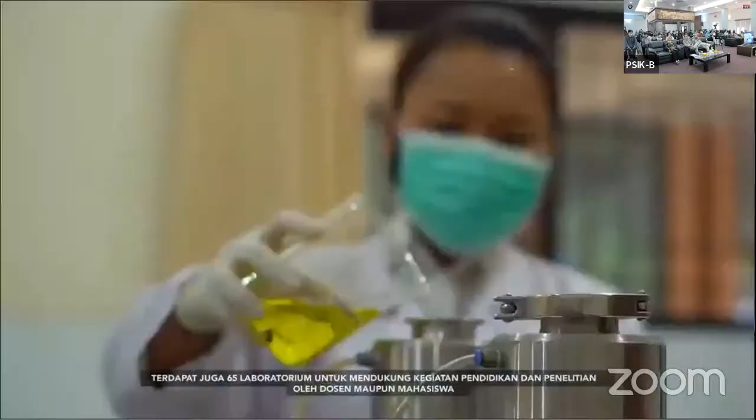There are also 65 laboratories to support educational and research activities by the lecturers and students. We are committed to continuing to improve the competence of lecturers and students, especially in facing the era of digitalization.

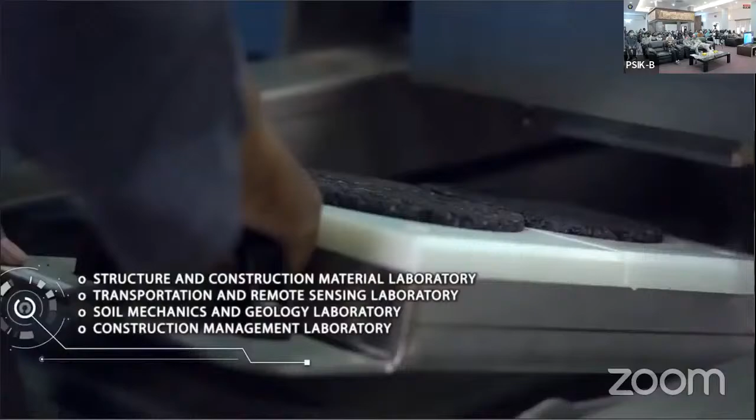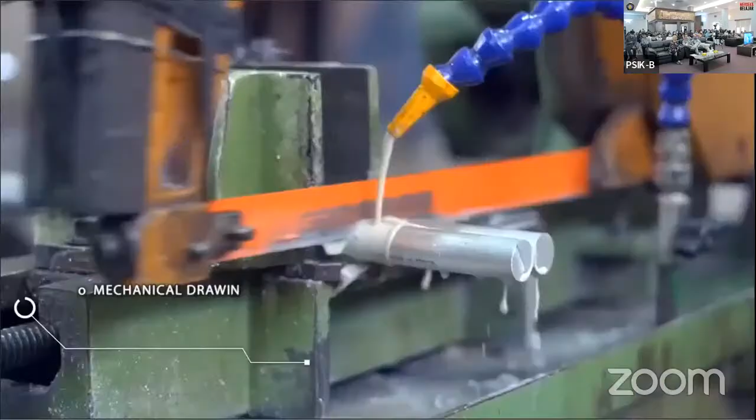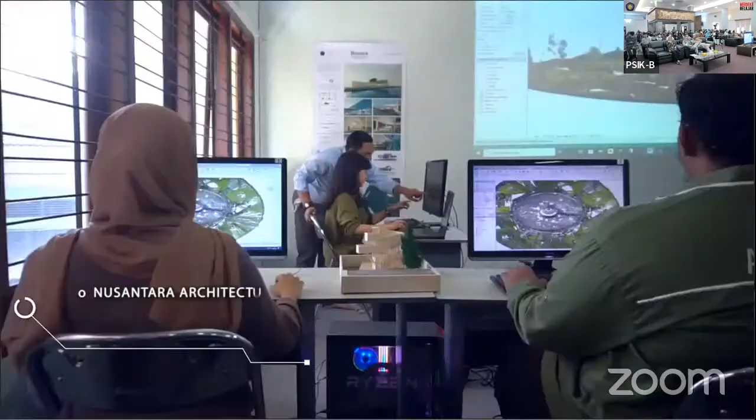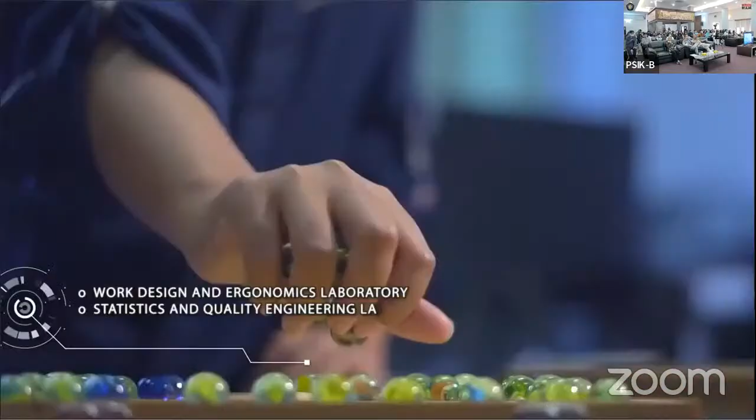The 9 departments under the Faculty of Engineering are: Civil Engineering Department, Mechanical Engineering Department, Water Resource Engineering Department, Electrical Engineering Department, Architecture Department, Urban and Regional Planning Department, Industrial Engineering Department, Chemical Engineering Department, and the Engineering Profession Program.

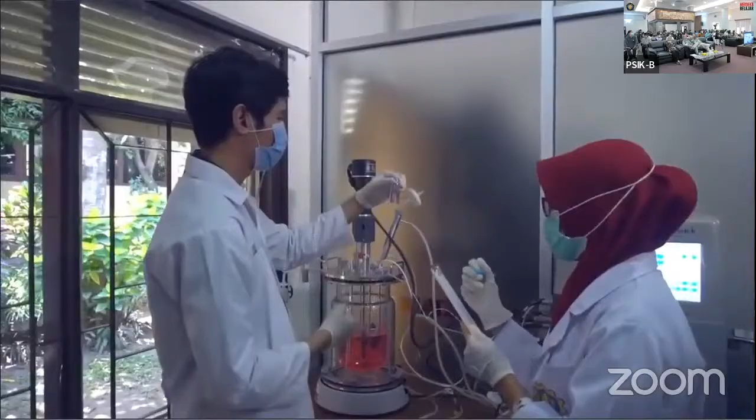The Faculty of Engineering provides facilities to support the academic atmosphere, including adequate classrooms, comfortable discussion rooms, libraries, worship places, canteens, sports centers, and student activity centers.

We believe that the Faculty of Engineering will further develop through collaboration with various stakeholders, through student exchange programs, double degrees, split programs, visiting professors, research collaborations, and international conference collaborations. Every year, lecturer achievements in the form of patents for research innovations are increasing. Students have also made proud achievements at the national and international levels.

With a spirit of innovation and collaboration, the Faculty of Engineering, Universitas Brawijaya, will work hard to present the best achievements for the sustainable development of the Republic of Indonesia.

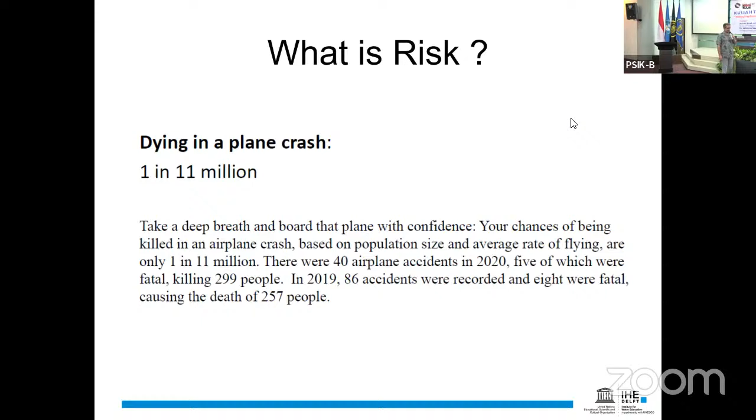However, if we really think statistically, the chance that each of us dies on our birthday is very high, because we have 365 days, and so the chance is 1 over 365. Okay, so we have 365 days, and therefore the chance is actually very high.

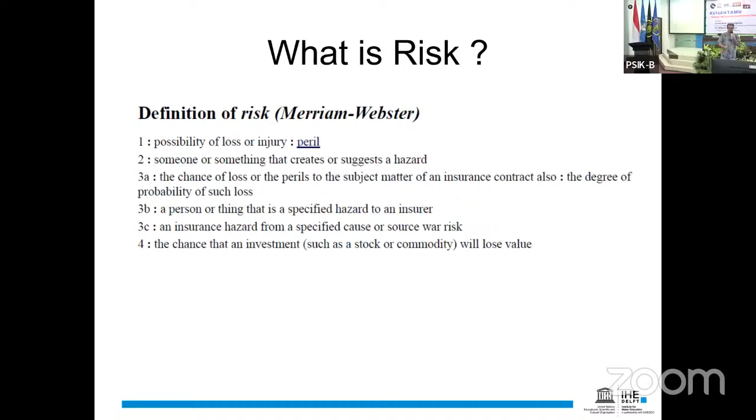Now, to get a more serious definition of risk, if we look at different definitions of risk in different dictionaries, for example this is a definition you can find in the Webster dictionary. I don't want to go into a lot of detail, but there are two important things we can see there.

So you can see that when we are talking about risk, we are talking about two main things: the probability of something happening to us, most probably something bad, as well as the consequence of that happening.

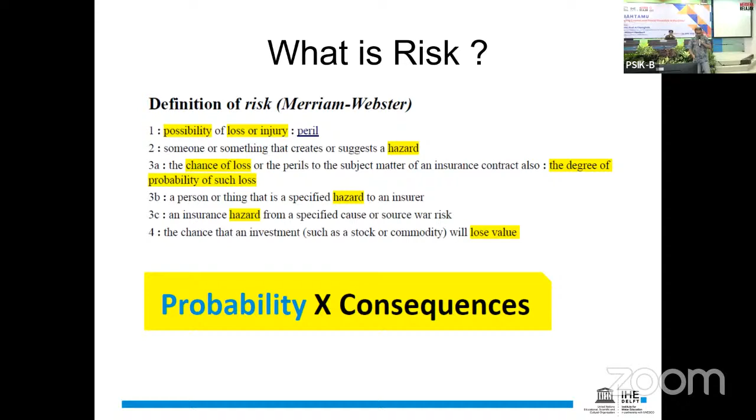For example, going back to the lady at the corner who was talking about the plane crash: although the probability of a plane crash is very low, because indeed we will lose our life, the consequence is very high. So the risk may be very high if we think about it that way. So this is about probability and consequences, and sometimes you accept the risk by reducing it to an acceptable level. For example, when you take your bike to come here, you accept risk.

But if you manage your risk and bring your probability of accident low, even if something happened to you, the consequence will not be so huge, so eventually you accept that risk. So this is all about probability of what happens to us and the consequences.

If we agree with this simple form of risk, then if we are planning for anything, for our future, for flood management, for taking a bus or a plane, or any planning, if we can determine what can happen, with what likelihood, with what probability, and what is the consequence of that event for us, for example a plane crash, a bike crash, or winning a lottery, that is also a sort of risk assessment. If we put the probability and the consequence together, then we can generate our so-called risk map.

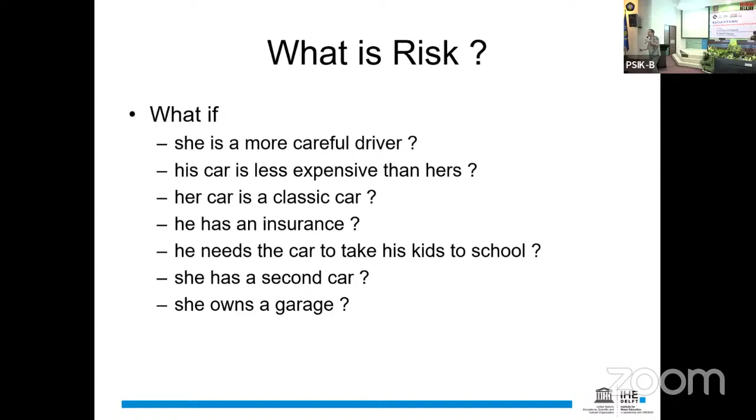We do the exact same thing also for flooding. But now, just to put some structure to it, in our terminology, or in the framework that I like to use - there are many different frameworks - I will divide the risk components into 3 components: hazard, exposure, and vulnerability. Hazard in this case is the accident.

In flood management, hazard is the flood - water comes in. Exposure is the asset, the valuable thing that we have which is in danger. In the car example it is the value of the car. If it is flood, it is the house, it is our house that may get flooded. It is our furniture that may be destroyed, our TVs or cars or whatever we have in the house which may be destroyed.

Then we have the third and maybe most interesting component of the risk, which we call vulnerability, and this is the degree that we can cope with the flood. For example, in the case of the car accident we discussed, if you have insurance, you reduce your risk, so you can cope better with the risk.

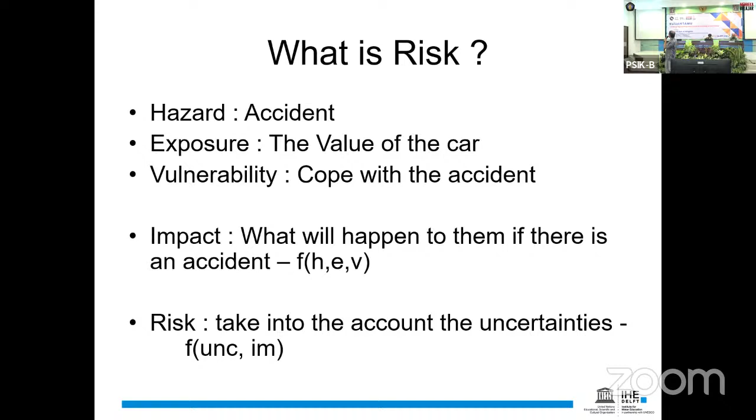So you reduce your exposure because your head is now not exposed directly to the ground or to the accident, but you have the safety there. So now, to reduce our risk, we can approach one or more of these components to reduce our risk. For example, if we are managing flood risk for ourselves, we can get our house insured. Or if the flood is always coming to our house, we can build it a bit higher, build 2 steps up, so that water cannot easily come to our house. But eventually, the risk is a combination of all these things with the probability of hazard.

And if we want to go back to the questions I asked about the car, and distribute it between different components, this is the distribution. The accident is the hazard, exposure is the car that they have, and vulnerability is how they can cope with the accident later.

So we talked about this, it's not important. Now, based on what I talked about, we want to put it in a more scientific, structural definition. When we are talking about general risk, for example for climate change or flooding, we talk about exposure and vulnerability. These are the definitions I took from the IPCC 2014 report. What is exposure? It is everything that is exposed to the hazard, like people, livelihood, species, ecosystem, environmental functioning, infrastructure, social or cultural assets. All of these are what can be harmed by a flood. What is vulnerability? It's how we can cope with that, how sensitive we are, how susceptible we are to the flood.

For example, when we're talking about flood risk, richer neighborhoods are less risky because they have more means to cope with the flood even if they are flooded, compared to poor neighborhoods. It depends on wealth, it depends on social status. For example, in some cultures, especially South Asian or Southeast Asian cultures, there's a sense of community to help each other in difficult times. So when the flood comes, a neighborhood can come together and try to solve it. This reduces the risk compared to living in a very individualist country where you are on your own. So culture also changes the vulnerability and eventually changes the risk.

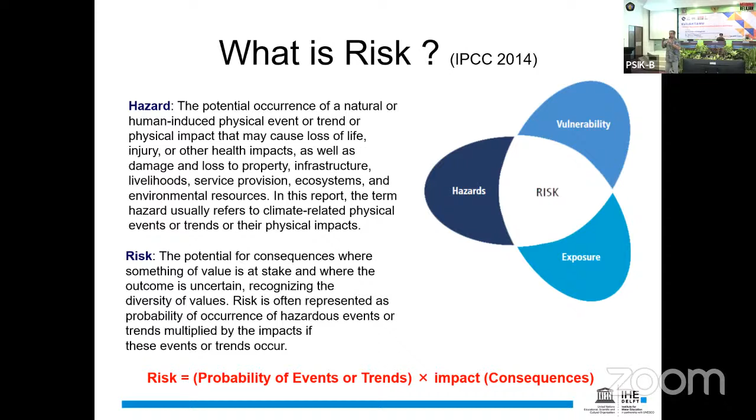Hazard is clear, it's the potential of a bad thing happening, an impact happening to us, and risk is putting it all together again: probability of event or trends multiplied by the impact or consequences.

Now, why do we need to do risk assessment? The main reason we have to do risk assessment is to be able to find where we have risk and try to do something there, try to reduce the risk there. But why can't we just go and make the risk everywhere zero? Why do you think we cannot go and make everything flood-free everywhere around the world, or in a city or a country, with zero risk to flood?

Would you do it if you could make the risk everywhere completely zero? Would you do it? Why not? You're shaking your head. Why not? You're not shaking your head? I haven't. No, okay.

You know, the main problem is that if you want to make everywhere risk-free, you need to have a lot of budget for that, a lot of money, that doesn't exist. So there is always a fight between resource management and risk management. We go to our mayor or governor and say, okay, we have a problem here. The first question they ask is, okay, how much? So we don't have that money. So there is always a negotiation between resource management and risk management. And then we need to go towards risk-informed decision-making, to do a risk assessment and decide which part is more important, which part is riskier, and then invest there to try to reduce risk and manage it together with our resources.

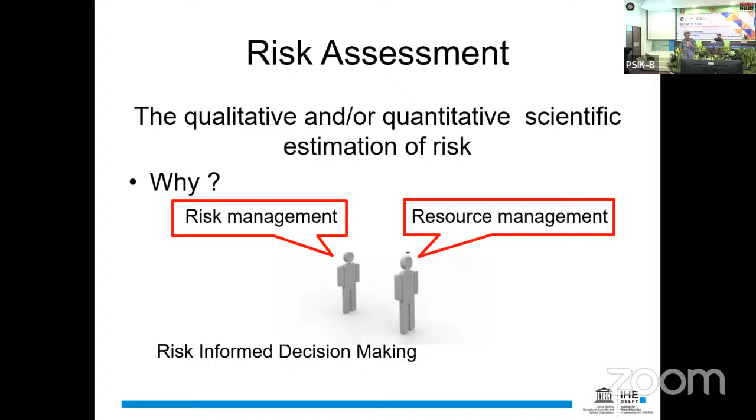Yep, so this is it. Now let's go to more of a flood. I was supposed to talk about flood, no? Not cars and bicycles. So imagine that you have a house beside the river and a flood is coming up.

One of the ways we do that is hazard is flooding. We look at the probability of the flood. We say, okay, it's 12% chance to have a flood. And then we say that if that flood comes, I will have 2 meters of water in my house.

If 2 meters of water comes to my house, I need to use 10% of the value of my house to repair it. So the hazard is flood, 2 meters of flood. The consequence in this case is 10,000 euro, and the probability is 12%. If we want to do it quickly in a traditional way, we multiply 12% by 10,000 euro, and we say your risk is about 1,200 euro.

That's a risk, but this is not the full thing, because we are looking at only one flood, 2 meter water, one probability, and we look only at the cost. So let's see if we can make it more complicated. Padoni laughs at me because I make life complicated step by step. Wait for it.

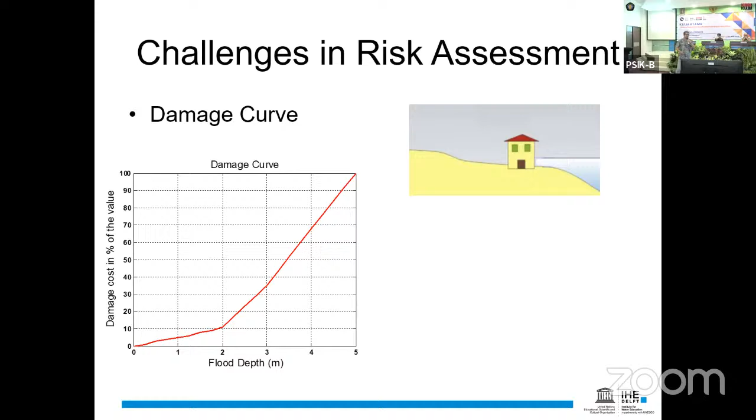Now by this, I can decide if I want to buy insurance or not, or maybe do something with my house to make it better. For example, if I put my expensive furniture on the first or second floor, I am better off because nothing will be lost on the ground floor if it gets flooded. So very simple things can change my risk, and this can help me decide what I want to do about it.

But this is not the complete picture of the risk. Why not? Just think about the secondary effects, the indirect effects. For example, to make life a bit more complicated, the fact of who will pay for repairing my house changes my risk. If there is no one to pay, no insurance, then I have higher risk.

If I have savings to do that, I have lower risk. So even two neighbors with the exact same house may have different risks, because one has savings and one doesn't, or one has insurance and one doesn't. How long does it take to repair? Can I repair it in 6 hours, or do I need to be out for a month or a year?

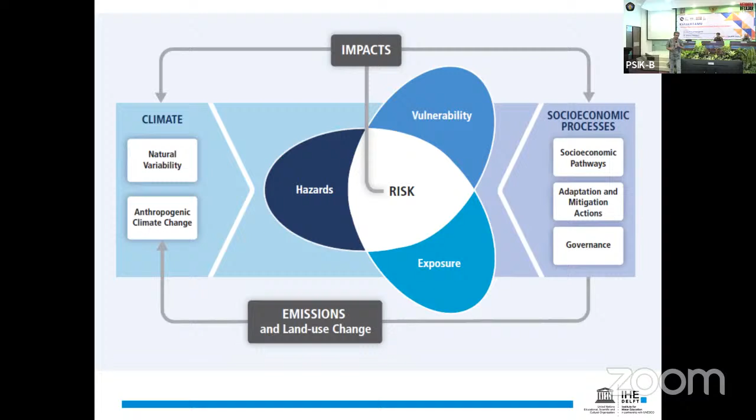So this will be the complete picture. We have vulnerability, hazard, exposure, so we have the risk, but climate is changing from one side and socio-economy changing from the other side. Climate is usually increasing our hazards, and economic growth may increase our exposure, or government may interfere to try to reduce our risk. This shows the full picture of risk assessment, for example in the flood risk assessment condition.

Now, just to finish this part of the course, I want to give you an example of a case in Indonesia where we did a flood risk management study. This is the city of Pekalongan in Central Java. Does anybody here come from there, from Central Java, from Pekalongan?

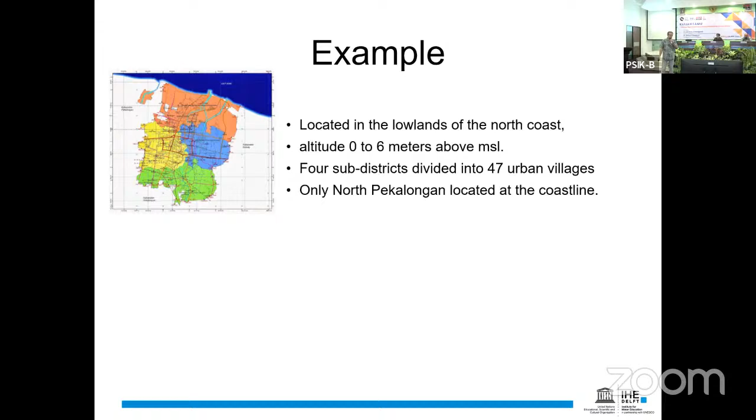I will show you. There's a city there, a very interesting city with some heritage. There are three rivers going through that city, and we also have the sea, of course, coming from the north.

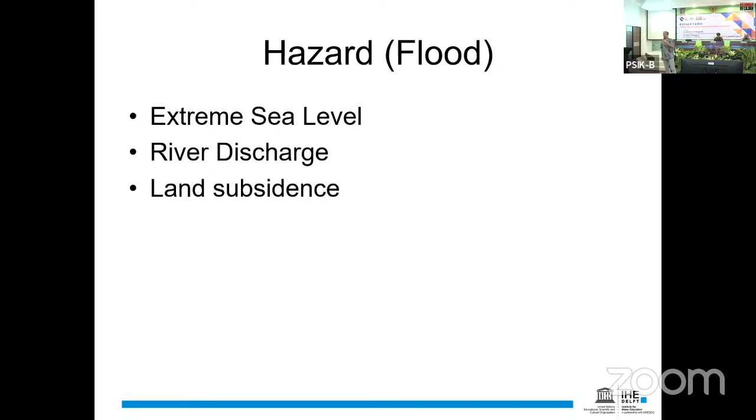Then we look at the flood hazard. The main reason of hazard there is extreme sea level, river discharge, and land subsidence. So land is going down, sea level is coming up, and rivers are coming.

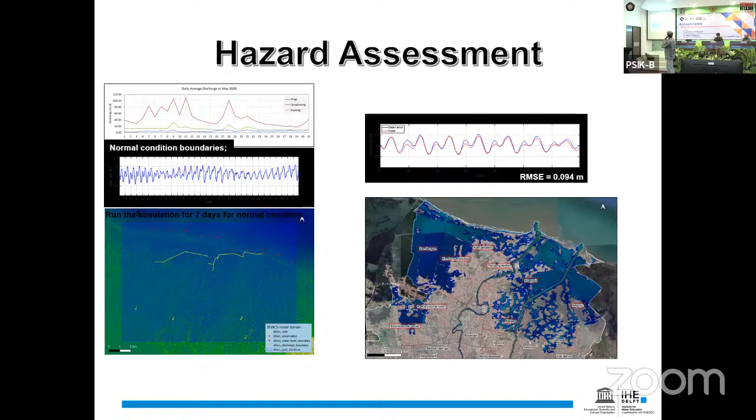So what we did, we tried to use the data that we have to make a flood map, so we can say that these places, based on one scenario, may get flooded. And if those got flooded, we looked at two scenarios in the future.

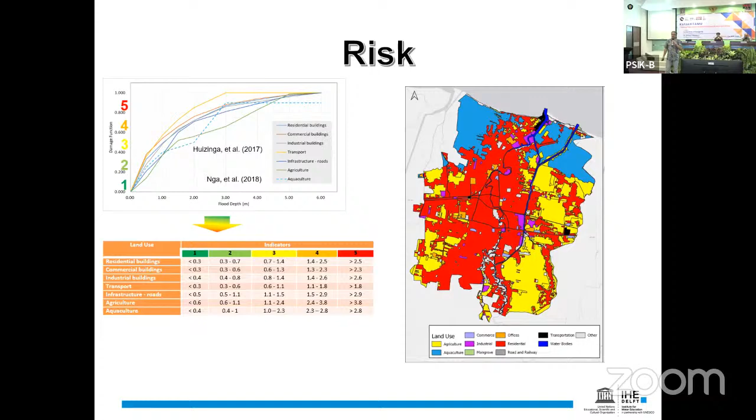Flood with extreme sea level and land subsidence. So we have extreme sea level in one scenario, and in another, land subsidence. Then we looked at the land use map of that city and decided how much water level each land use can accept, and developed a risk map like this.

Now you can see that in the present condition of land use and present flood, if we go to the future with that specific scenario, we will have huge risky areas, a lot of risky areas. A lot of places become red, because flood is increasing.

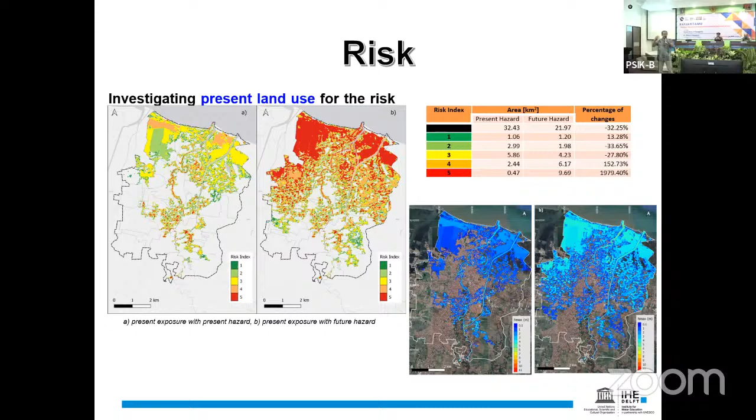But then we thought, okay, how can we reduce this risk? They came up with a plan for the future to implement a different land use in the city. And if we use that land use in our risk assessment, we saw that yes, indeed, if they make that land use in the future, the risk will be reduced.

So in this case, this specific risk reduction measure didn't do anything with flood. We didn't stop the flooding, we didn't reduce the hazard, but we reduced the consequences. So this is more or less the concept of risk and one example of how we do risk assessment. I think William will take it from here and show how we can do things inside the city to make it more resilient to flood risk.

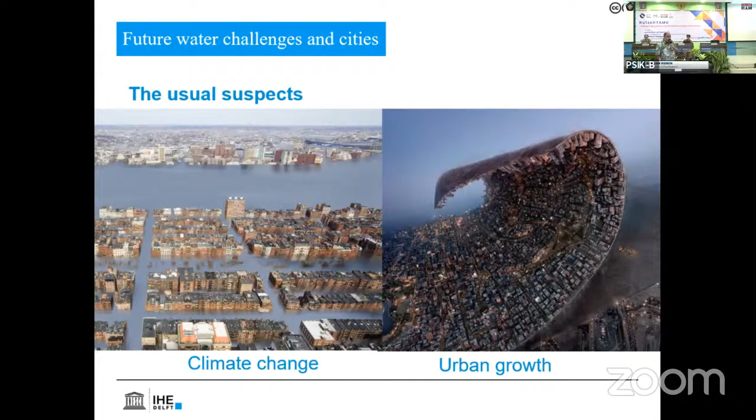Another risk driver is urban development. Ali gave you the risk components: hazard, exposure, vulnerability. Our cities are growing all the time in places where they shouldn't actually grow, in the floodplains, close to coastal areas where there's maybe a tsunami threat. We concentrate more and more people and assets in dangerous places, and that will definitely increase our risk in the future.

There are also other risks we engineers might be more aware of, and maybe planners not so much. Our infrastructure is getting older, starts failing, water pipes are breaking, our drainage channels are breaking or clogging up. A lot of our infrastructure needs maintenance, needs upgrading. In many European cities, the urban drainage system is extremely old, already more than 150 years old, at the turning point of breaking down, and needs large investments to be upgraded and to cope not only with future climate change, but also with the rainfall we have today.

So to summarize, cities have to cope with climate change, aging water infrastructure, rapidly changing urban areas, but also demands from you, the citizens. Slowly you want more urban green maybe, a more livable city, less traffic. So the way you look at your city, the things you accept from your cities are also changing. And we see an increasing impact of urban areas on our ecosystems.

If you're a water guy, from water resource management, we like to look at cities from that perspective. You can see a sort of evolution in cities. If we're on the most elementary level, and we only want to provide water supply access, we could say we live in a water supply city. This is the most rudimentary form.

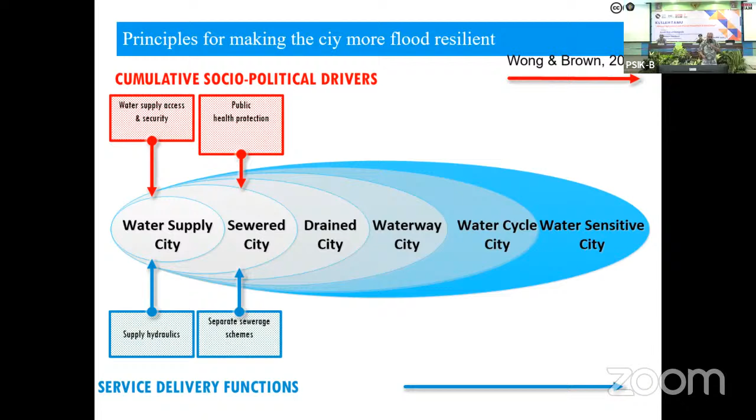After oxygen, water is the first thing we as humans need, right? Without it, we can't live. After providing water supply, the second necessity is public health protection, sewage. And we can move on, then we can start talking about flood protection. We move to the drained city. We want to require environmental pollution standards, etc.

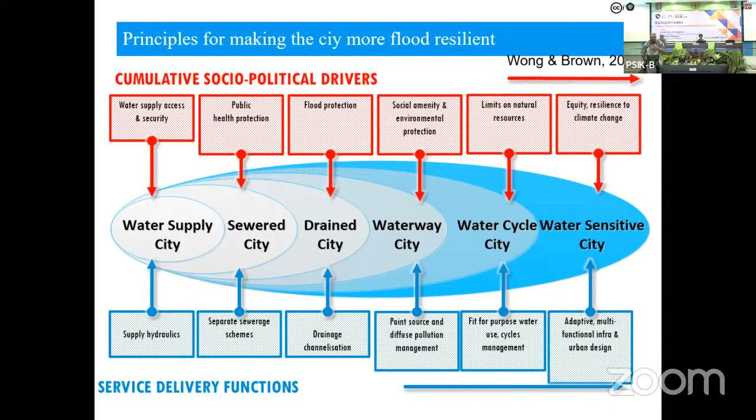We walk into the waterway city, the water cycle city, when we start to talk more about sustainability. And ultimately, you could say we want to move towards the water-sensitive city, maybe the last step in the evolution of cities towards a more sustainable, integrated water environment. Now, what is that? I'll tell you a little bit about that. If you're a water resource student, this should be bread and butter—you know this by heart.

Then we started to build our cities. So what did we do? We paved a lot of ground. So on the one hand, we have the same amount of precipitation, but because that water can't infiltrate anymore, we have large volumes of urban runoff. We don't have a lot of trees anymore, so that water cannot evapotranspirate, which is why the volume of runoff is increasing.

Also, because we live there, we have huge volumes of wastewater, and we have to import so-called virtual water and potable water. Virtual water is water that's embedded in products. So if you want to go there, you can talk about the water footprint—maybe you've heard about that. That's really the amount of water needed to produce particular products.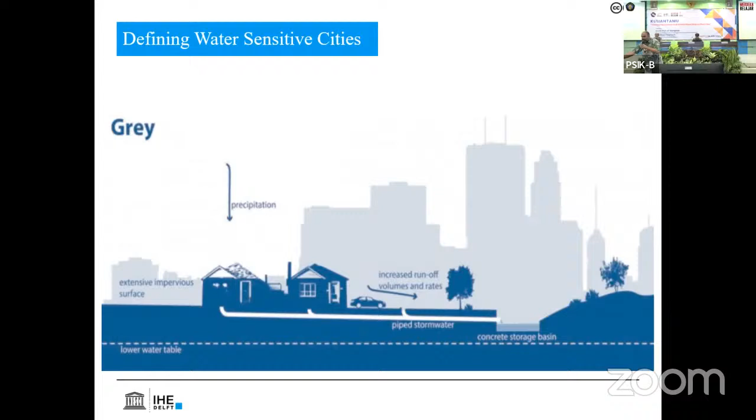So to compensate for that, we implemented a lot of so-called gray infrastructure, the typical engineer stuff - all the pipes in the ground to provide urban drainage, water supply, etc. And you see there often the difference between architects, planners maybe, and the engineers. Architects and planners, they care about what's above the ground, and all that other stuff the engineers have to solve. You guys do your thing underground, right, and solve our water problems.

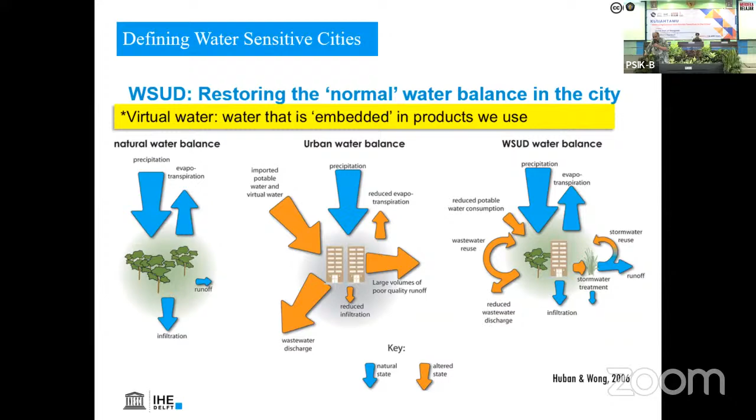Now, when we talk about a water-sensitive city, we want to integrate the two much more. So instead of just accepting the amount of runoff that we have, that is polluted maybe, and we get rid of it, we start to reuse some of our stormwater. We try to increase the amount of urban green that we have, so we have more evapotranspiration, and we treat some of our stormwater and increase the amount of infiltration. So what we do is we try to close that water cycle a little bit in our urban areas and bring some of that natural water cycle back to our cities. So you see that nicely over here, or what we try to do.

So what we typically did was - and this is for instance from my country, I'm from the Netherlands - when we look at the environmental degradation that our cities produced in the 1800s, just before the big industrial revolution took place, we were doing pretty fine. But then we started to build a lot, have a lot of heavy industry in the cities, and we really started to go above, let's say, a safe limit to the environment, and now we have to repair a lot of our mistakes that we made in the past.

And you see that very literally if you go here to Seoul, capital of Korea, South Korea. And you see what happened there. In the past, they had an urban river. That river was used mostly as a drainage canal, and as so often in the industrial age, that became very dirty. People dumped a lot of wastewater in there, solid waste, and they just covered it - made it one big culvert. And then car ownership was on the rise in the 1960s, so they thought, okay, we can cover it with a big highway, we hide the rivers, and we have good road access in our city.

And then some engineers said, hey, that was not a good idea. We're going to bring this back. We're going to do river restoration. We're going to really, literally, overcome the mistakes from the past. So actually, the company that built the highway - the CEO of this company - he became the mayor of Seoul, and he uncovered that road again. And that's the Cheonggyecheon River.

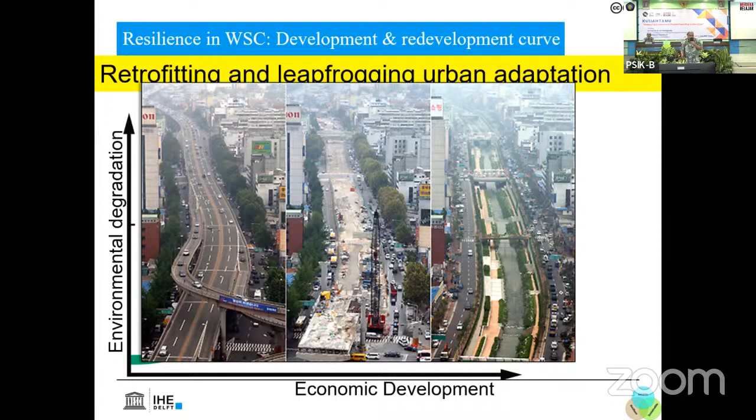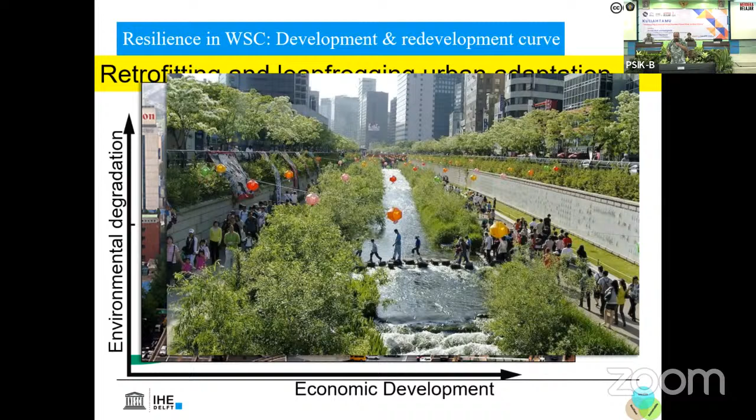And you see, for instance, how that looks now. Maybe you've seen images of this in Seoul. So there's a big river restoration project. The highway is taken away. They invested in more public transport. And this is now really an area that adds to the culture of Seoul, but very much also to the climate, providing a wind corridor, so there's a better urban climate in the city. And this is now one of the best spots in Seoul, and really celebrated all over the world as a great example of green urban regeneration.

Okay, so that's an example of a water-sensitive city project where we integrate urban blue and green above ground and really create an interaction between, on the one hand, sustainable urban development, and the urban water cycle, and the urban design and build form. So it's an integration between what you water resource people do, your engineers do, and you planners do together - not anymore as separate sectors.

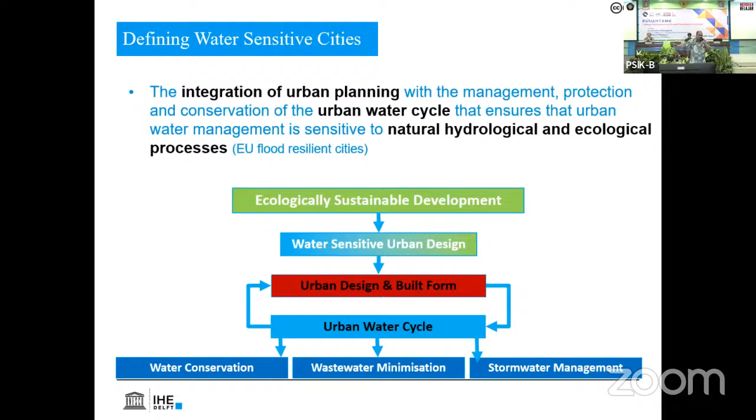So this approach you see now all over the world a bit. For instance, you might have heard about the Chinese Sponge City program. The Chinese are laying out a massive program to treat cities literally like a sponge - really to do more with their stormwater, reuse it, infiltrate it, and not anymore just drain it out in dirty old drainage channels.

In other countries in the world, they call it differently. So the water-sensitive cities is typically an Australian term, initially driven very much by drought management, because Australia, in the past, always had big drought problems - now you see also flood problems appearing. China has Sponge Cities, LID (low impact development) in the US, blue green infrastructure in Europe, sustainable urban drainage in the UK, etc. It's basically all the same - a little bit different approach, but it's a different name for the same concept.

An example of that you see in the city of Copenhagen. This is a huge flood in 2011 that they had. They called it a cloudburst event - they had 150 millimeters in 2 hours, and for Copenhagen, that's a huge amount of rain. So that's a 2,000 year event - talking about likelihoods and probabilities, that's a 2,000 year event that happened.

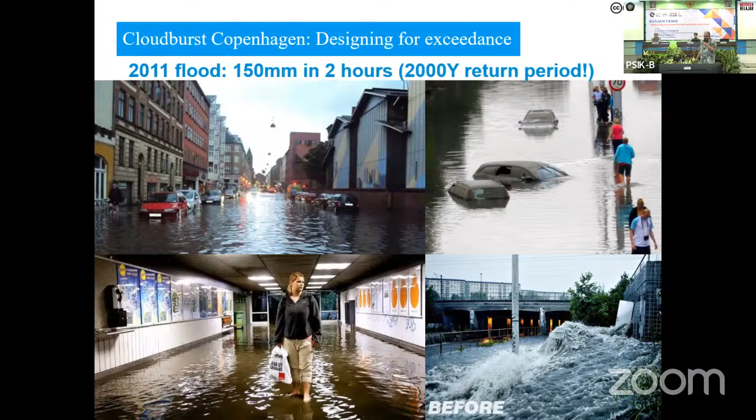As a response, they started to develop water-sensitive city projects that on the one hand improve the climate resilience, the resistance that a city has to climate impacts, but on the other hand also increase the livability and urban quality of the city. So they are now working on more than 300 different projects over the coming 20 years.

Let's not go too much into detail, but here you see the threats they are facing, and they really are facing a shift. On the left you see a 100-year pluvial flood, rainfall flooding, in 2010, but they also have to deal more and more with coastal flooding. This is a 20-year coastal flood event estimated for 100 years later, in 2110. So Copenhagen has to deal with multiple hazards.

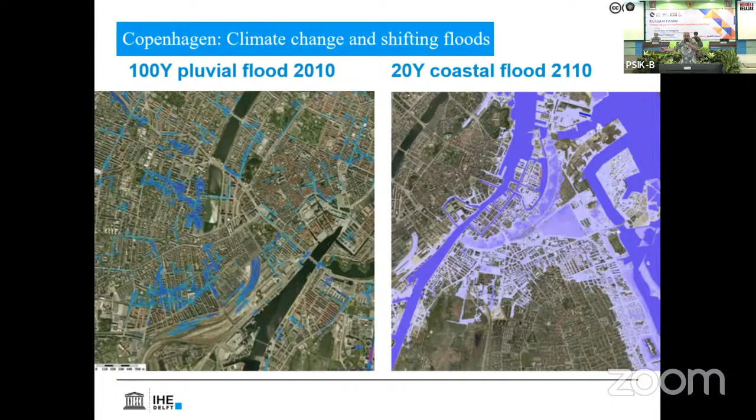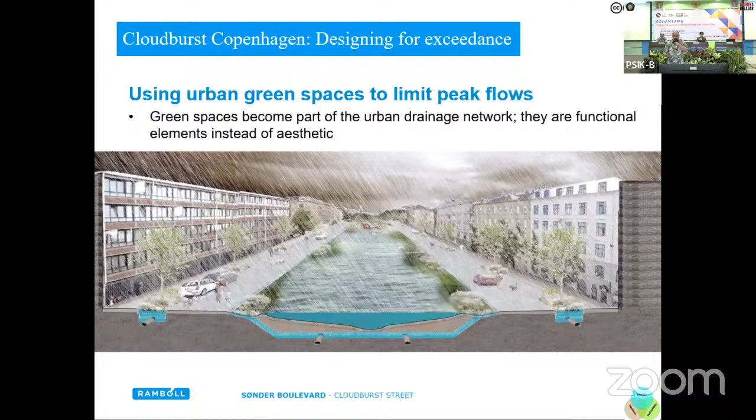Here it's raining, and here you see how that area functions during a heavy rainfall event. The street starts to have a function as flood retention. It's not anymore just something for the engineers to fix underground, right? No, it's integrated into the urban plan and the urban design of the city.

Here's an urban street where, during normal events, they changed a 2-lane road into a 1-lane road with a bicycle path, and on the side you see those green spaces. There stormwater is captured, treated, drained out, and reused again in other places. This is how it looks during a normal dry day.

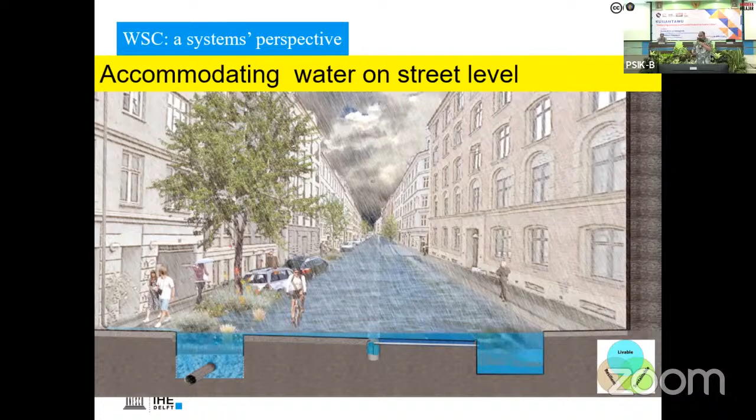But when it's raining hard and the street is flooded, you see the sidewalks are elevated on the side, so people can still walk there. But in the center, this area is really used as a flood conveyance channel and drained out. So this is a little bit how that works.

There's a lot of information about these kinds of things. If you Google bioswale on the internet, you see how these different layers are used to also clean stormwater. So you can really reuse it, for instance, for your garden, for other secondary water uses, maybe for your laundry machine, for your toilets, of course, etc.

Okay, that's all very nice quality, you saw a bit of flood. So let's structure this a little bit. Ali was talking a lot about risk, and if we talk about the hazards, he also introduced that we can think of four classes of events. You see that at the top.

You see everyday events, like today - nothing special, not especially bad weather, there's no rain. Typically, as an engineer, you don't design stuff for this. Then we have so-called design events. These are your standards. So maybe as an engineer you say, okay, I have a design standard of a rainfall event once every 5 years. So I have to create a drainage system that can capture all that water from a 5-year event, that statistically happens once every 5 years, and drain that out.

If the event is bigger, okay, we're going to have flood, but at least I reached my 5-year event. Then we have so-called exceedance events. That's above that event, rain that happens maybe every 10 years, or 15, or 100 years. So there's quite some flood, but it's not life-threatening.

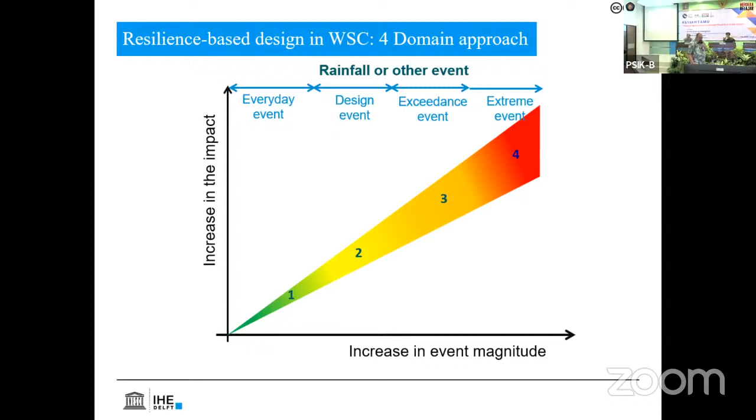Finally, we have our extreme events. Those freak events that once in a while happen. There's loads of rain, really 2 meters of floods. And the city we've been working on this past week experienced some of these events earlier. So you have these 4 classes of events. Now you could say that professionally we are dealing with those different classes.

I've never heard an architect who is thinking about design events. What is a design event, for instance? If you're an architect, there will be the fire escape. I have never seen an architect who put a lot of effort into designing a very beautiful fire escape, right? No, you are there to create urban quality, everyday quality for day-to-day events. You are there to create value in the city, livable cities.

As an engineer, you typically are also not designing a great fire escape, but you are the ones that make it. You have to make sure your buildings or other urban assets comply with the safety standards that are there. But you are not so much thinking of exceedance, what if they go beyond? Then we are talking about insurance, public works.

People have to clean up afterwards, right? And finally, if there are extreme events, that's something for the emergency service people, they have to handle that. Maybe the army even, who has to come into effect to help out, evacuate people, things like that.

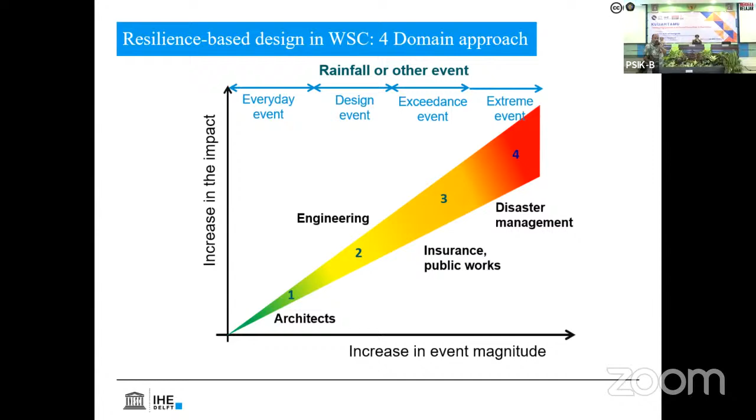So if we want to make our cities more climate resilient, we want to design in a way for as much as possible for all these 4 stages. Not only should architects think of day-to-day value creation, engineers not only think of design events, but collaborate. And also the emergency services and all those other stakeholders, professionals, could be integrated. I'll try to show you a few examples of this.

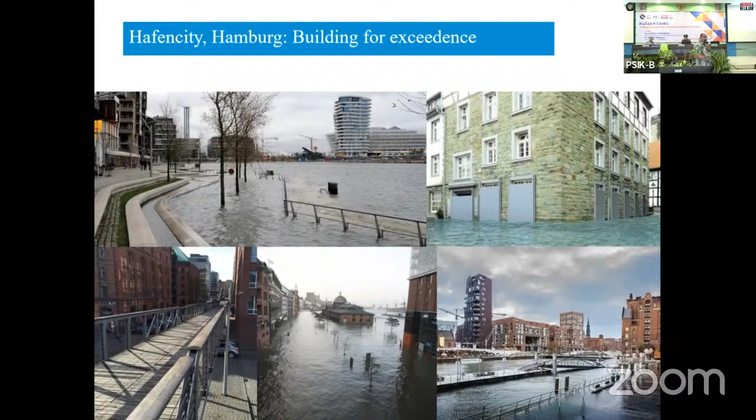Another example, and why they do this: this is in the city of Hamburg in Germany, where there's a whole neighborhood completely adapted to cope with floods. If they see the river levels going up, they know in advance, there's an early warning system. They have flood shutters that you see on the right side here, so all these houses can be closed. They have evacuation routes above ground, bridges. So they designed this whole area that looks great during normal events, but also still works during floods.

Because you water resource engineers who did urban drainage courses know it's not the volume of water that's the problem, it's the intensity of the peak, right? So if we have a very strong, short but intense rainfall event, our drainage channels cannot take it. But if it goes slowly, if we can delay that water flowing in, then there's not a problem. So that's what we actually do here.

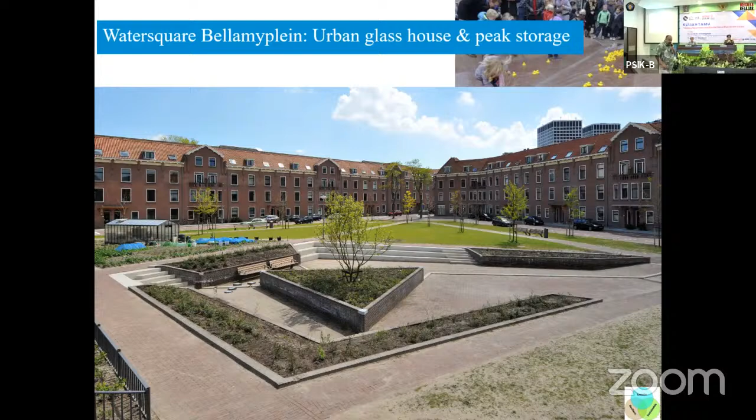So what brings people together in the world? Food. So they grow food together with the whole community of women over here, the children are there too. At the same time, they take ownership of the area, so they clean it and maintain it, so it works very well. It's a nice project, very simple. And when there's a lot of rain, it looks like this, with a little boy who put a lot of ducks in the water, apparently.

Bigger example. This is the project called the Big U for New York City. A while ago, Hurricane Sandy caused a lot of damage in Manhattan, but also in other areas in New York, Staten Island for instance. In a Rebuild by Design competition, they developed the Big U, led by a Danish design firm. They created a buffer around New York City to cope better with river floods.

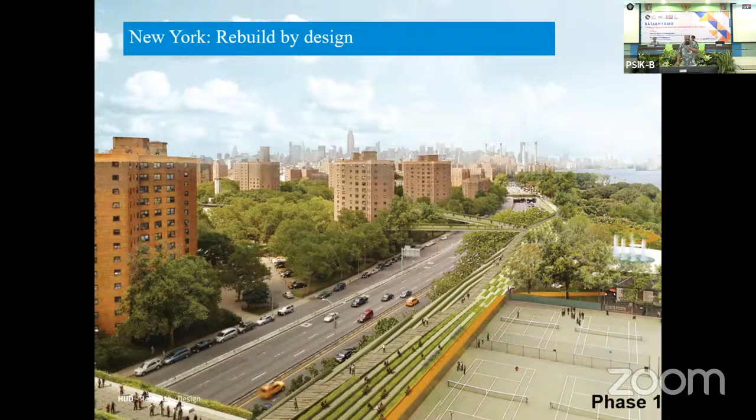This is a poorer area with these brownstone complexes, old social housing projects, and this was normally a highway, a bad area, disconnected from the water. What they did is first build a recreation park on the side, and now they are covering that whole highway to make it a dike that protects the area from future floods, but also combines it with a recreation area. So you have a multifunctional project, increasing the resiliency of the city but also increasing its livability. That's combining the two professions, the two values.

This also helps in the financing. The shops pay for the park. The national government, who is responsible for the dike, pays for that dike, and together they create a really nice public area that normally there would not be money for. So from a financial perspective it's interesting to combine things, because one function can pay for another where there would normally not be money.

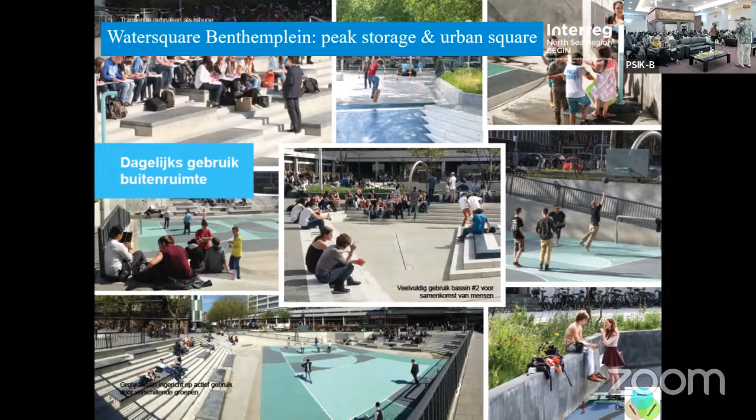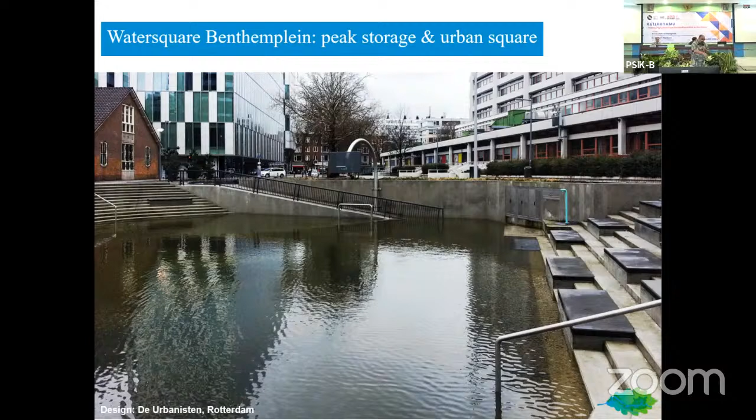More of these water squares. The water square concept in the city of Rotterdam is one they are employing everywhere. It's scalable, small-scale interventions that improve public space but also help make the city more flood resilient. The good thing is this is a gradual process, so you don't have to do it all at once. Whenever there's an opportunity for an area to be redeveloped, they start designing this, so slowly the risk level of the city goes down over time.

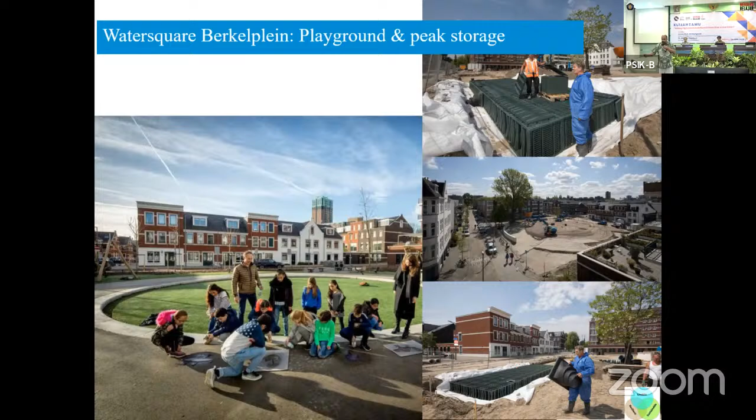Here's another one. On the top right you see these plastic crates in which water is stored underground, temporary storage facilities, and on top there will be a square for children to play and for the elderly to sit. A similar project is on an area that's normally never used, under a big highway flyover. Rotterdam is really searching for every spot available to store water and develop urban quality.

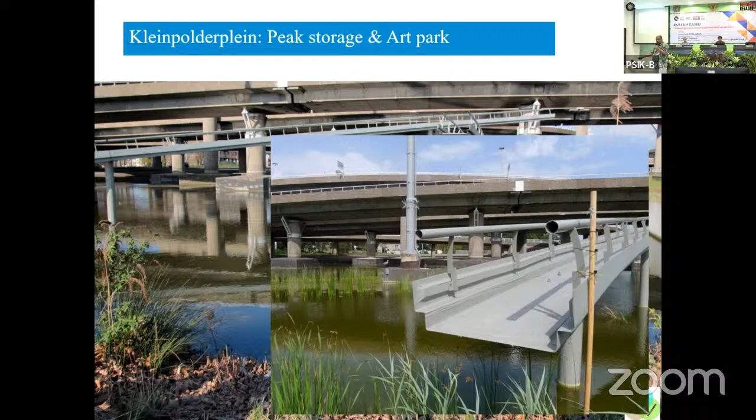Also here, a nature project where people now go to walk the dog for instance, but it's also used for flood retention.

We don't only do that in rich countries like the Netherlands, but we try to do it elsewhere too. Here I am in Bangladesh, in Dhaka, the capital, and here you see a so-called lift house, a house that can literally float when it gets flooded. It's built with a bottom made out of crates of PET bottles, plastic bottles that float in the water.

The bamboo structure sits on top. It's housing for the poor, so when there's a flood, that part will literally start floating. Here you see the construction of that.

Here you see similar things we are trying to do in a peri-urban area outside Dhaka, in a city called Sirajganj, where we make a so-called amphibious sanitation unit, with a floating construction and also a bio-infiltrated toilet where the water is cleaned.

We saw some interesting cultural issues here. I didn't design this, it was done together with another office. Culturally, this toilet didn't really work out. This is where design and engineering don't always align. From a water perspective, it works perfectly - the water is cleaned, the structure floats very well, so when there's a flood, no problem. But the toilet is extremely exposed, so nobody wants to go there, because you have the feeling the whole world is watching you. That was really a design problem - they didn't think it through very well.

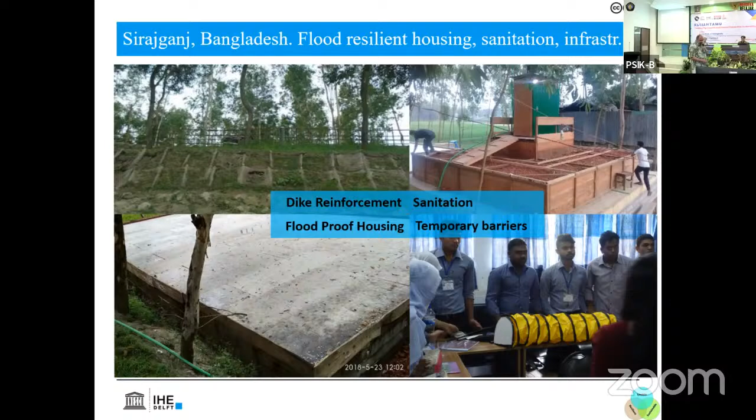Anyway, here you see us making floating floors. We retrofitted one of the very cheap housing units for the urban poor, where they normally have a floor on clay, and we made a new floor with PET bottles and wood on top, which can also float up inside the house during a flood. You see us collecting PET bottles here, and here's the construction of that floor in the actual house, and it can move up and remain stable.

That's quite a nice project, I'm very proud of this one. We had a lot of publicity, so that works when you do this stuff - there's huge attention at the moment for this. So don't think it only costs money. Everybody's looking for flood resilient solutions in cities, and if you can combine that with poverty reduction as well...

I'm still waiting for Bill and Melinda Gates to call me to sponsor a big project. But yeah, they're divorced now, so that's maybe a problem.

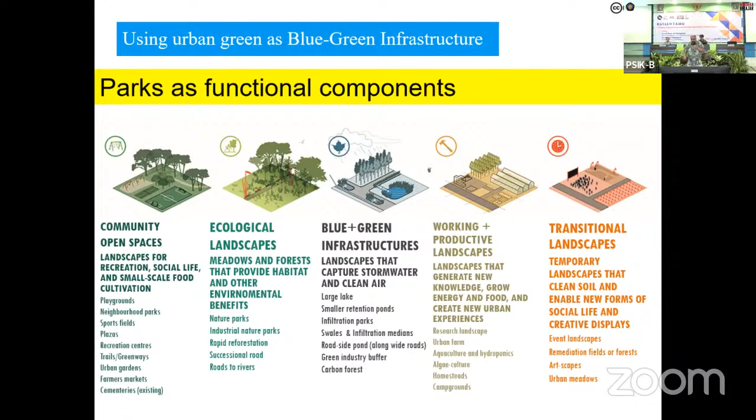I'm almost at the end, no worries. We try to do that with buildings, but also with parks, etc. So here you see that we no longer think of urban green spaces only as aesthetic things that make the city more beautiful, but as functional elements where we can add climate functions, and other functions, to the city. That can include community open spaces, ecological landscapes, blue and green infrastructure, working and productive landscapes, urban agriculture, and transitional landscapes, which can turn into big projects.

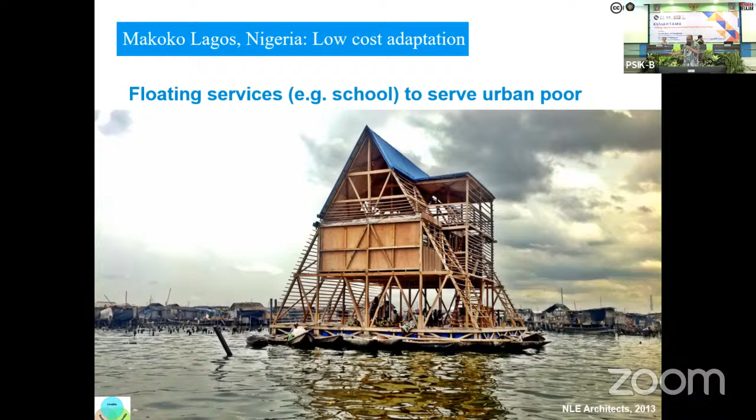And here we are in a project that is more flood resilient - this is a floating school in Makoko, in Lagos, Nigeria, one of the most challenging cities in the world, with a lot of informal settlements and literally no space left to build. So you can only resolve to floating structures that have the good quality of not flooding, because they literally move with the flow. You see that here in that largely amphibious, even floating, community.

In a place where there's a lot of people, there's nothing. So, again, an example of how urban planners and engineers should really work better together to create safer cities, but also cities that create more value for its people.

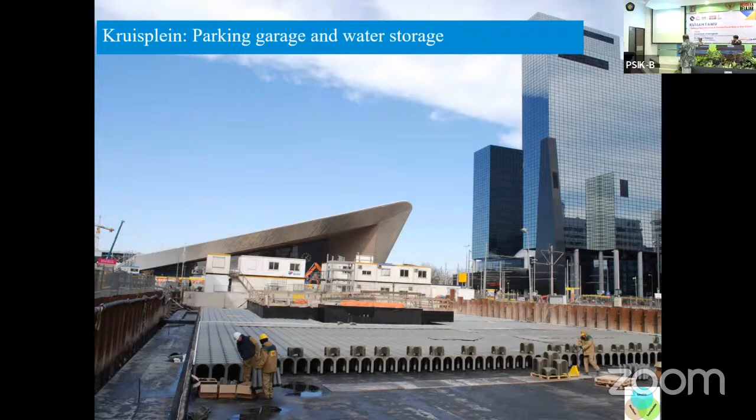Well, bioswales, I already covered that a little bit. Green roofs, here we try to mainstream this. The central station of Rotterdam, the train station, in front of it is a huge parking garage with 8 floors under the ground. Normally the people who designed those parking garages would just finish it and build it. But now here also the water people started to interfere and say, we also have a program, we need to solve a flood problem. So on the roof of the parking garage, they made another water storage with these plastic crates you see here. This provides temporal water storage that will be drained out later.

So again, a combination. And we have also our High Line, like every respectable city these days. There's an old train station that has been turned into blue-green infrastructure and is now used as a landscape park in the city of Rotterdam. That also has a function to provide less urban heat, because drought and urban heat is an increasing problem, also in my city in the Netherlands.

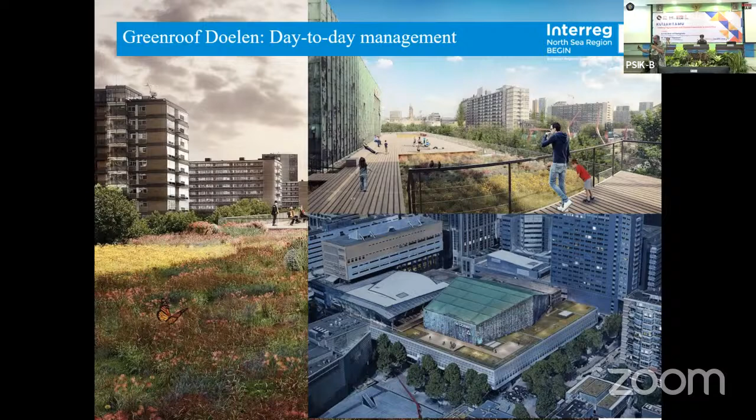Green roofs, we have a massive green roof program. Green roofs are nice, but they have limited functionality when it comes to flood reduction. That's often a bit overstated in the media. In the newspapers you'd say it's the next big thing after sliced bread, but that's really not the case. They can capture some stormwater, but if you have a peak rainfall event, they do not do that much. But for the urban climate, air quality, and recreation, they are great.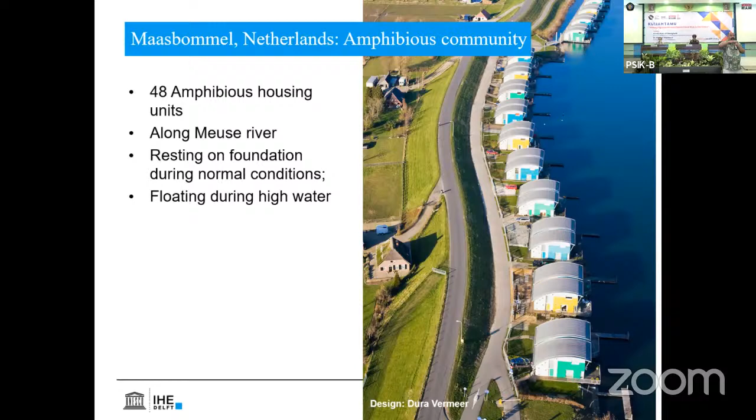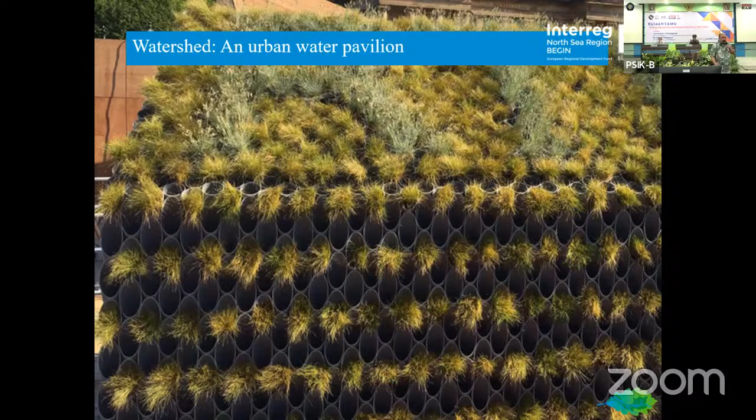And here you see a few projects just for fun, to make people more aware of the issue of climate change, of water. This is, for instance, a so-called watershed, a small pavilion made out of PVC pipes in which we put vegetation structures that will slowly drip through when it's raining. It's a great way to make citizens more aware of the issues of rainfall events and of climate in general. Here you see stormwater capturing, very small, simple projects.

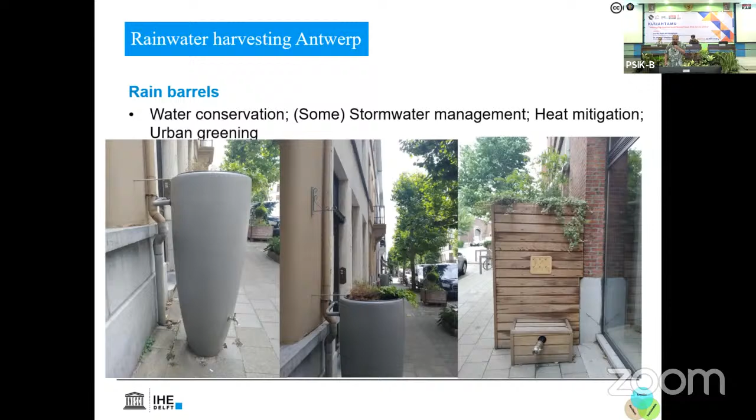Rainwater harvesting, again, water is captured so people can use it for irrigation. And if you do this at a massive scale, it starts to add up. If you have 5 houses where you do it, it means nothing, it's literally a drop in the ocean. But this is happening, this is in Antwerp.

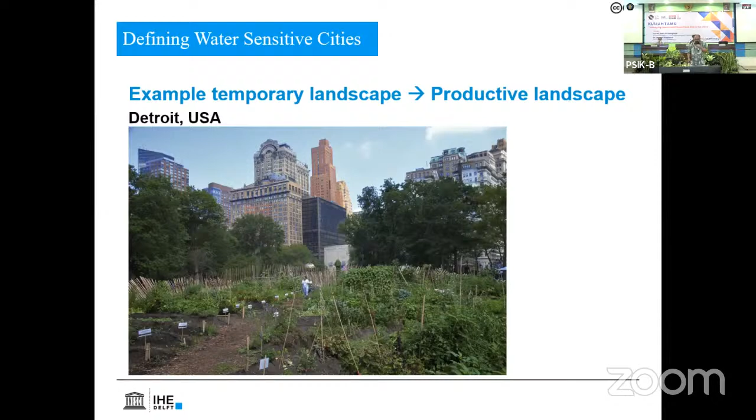Urban gardening and urban agriculture. This is in Detroit, a city that has been largely abandoned for a while because of the decline of the American car industry. So a lot of people moved away, and all of a sudden space was available, space was cheap. So you start to see an integration of urban green into the city, and ultimately this also has some climate function, although here it's not really designed and limited.

Okay, I'm closing. We developed a set of 10 commandments, if you will, for water-sensitive cities. If you want to be a water-sensitive city, we think you have to do this. So we often go to cities and say, can you score this? Can you test this? Can you do a self-assessment?

I don't know, we're in Malang here. We have the structures in place to involve citizens in the planning, design and implementation of blue-green infrastructure projects. Do you have that? If I'm a citizen, can I call and say I will be involved in the formulation of projects? Do you involve citizens, or is it difficult?

I don't know, okay, maybe I won't go through all these 10. But it is about citizen participation on the one hand, so how are you as communities able to be involved, but also to start projects by yourself if you want. I see some community-based projects also here, I heard about those. It's about design integration on the small scale, but also on the city-wide scale. So do you have a vision that involves climate change and climate adaptation, but also livability, ecology, and sustainability for 2050, for instance? It's about financing and evaluation. How do you finance this?

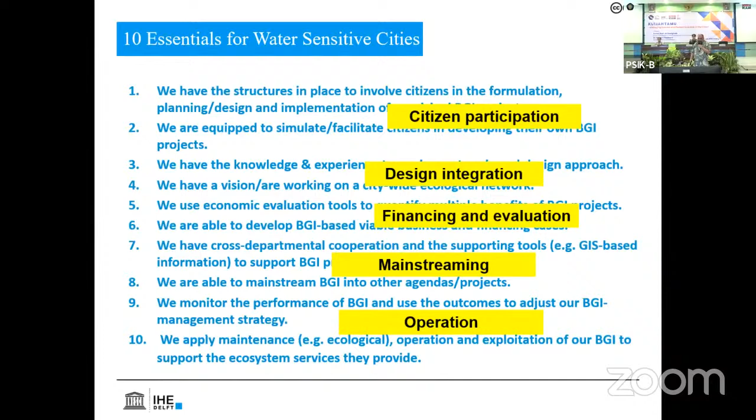And finally, if you don't manage to do all this, at least you can adapt gracefully and go down fashionably, and be resilient in this way. Thank you very much.

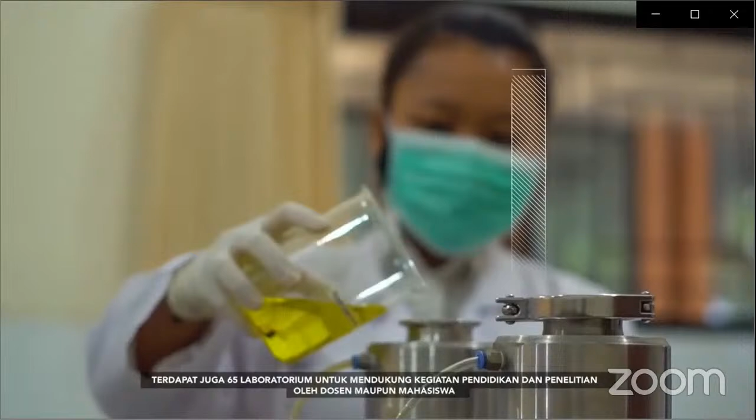We have professors and associate professors among lecturers with excellent reputation in scientific research and publication. There are also 65 laboratories to support educational and research activities by the lecturers and students. We are committed to continuing to improve the competence of lecturers and students, especially in facing the era of digitalization.

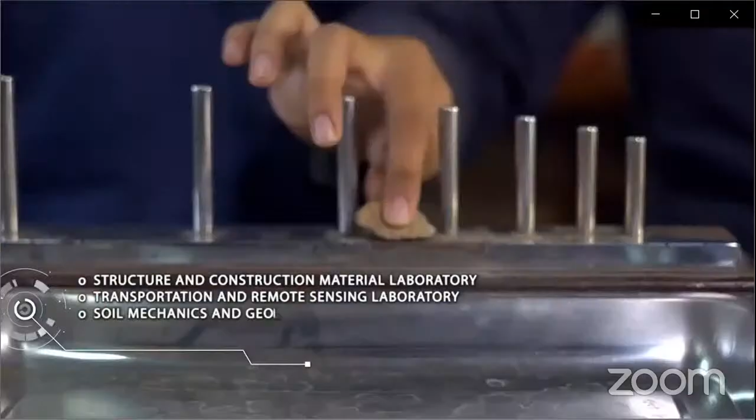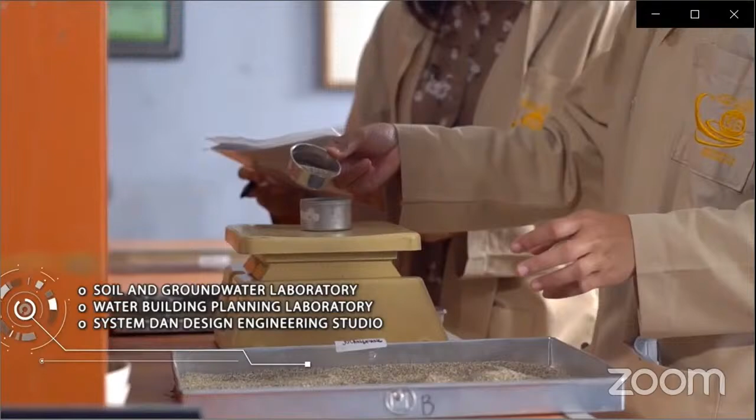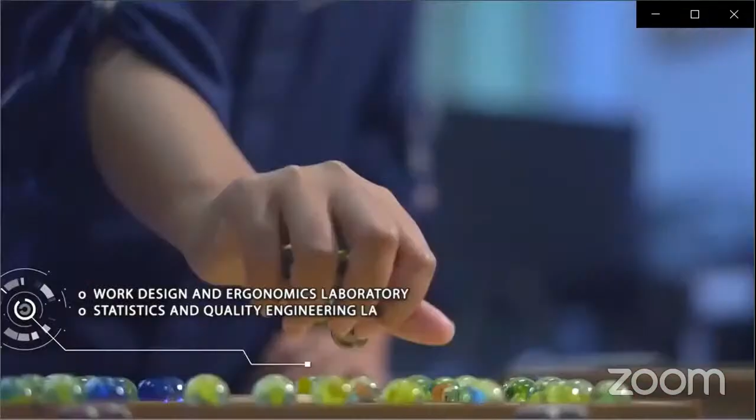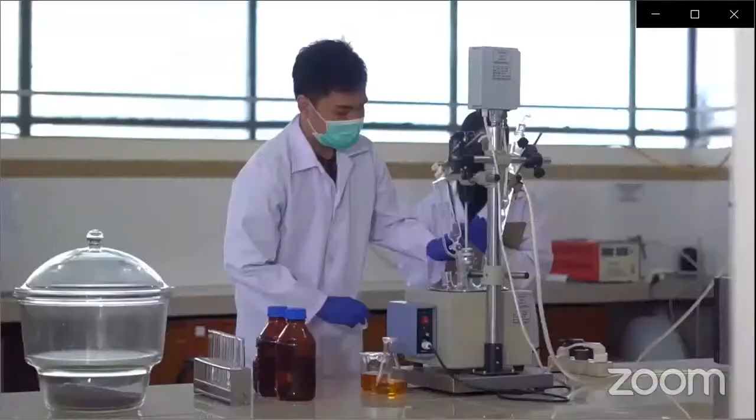The 9 departments under the Faculty of Engineering are: Civil Engineering Department, Mechanical Engineering Department, Water Resource Engineering Department, Electrical Engineering Department, Architecture Department, Urban and Regional Planning Department, Industrial Engineering Department, Chemical Engineering Department, and Engineering Profession Program.

The Faculty of Engineering provides facilities to support the academic atmosphere, including adequate classrooms, comfortable discussion rooms, libraries, worship places, canteens, sports centers, and student activity centers.

We believe that the Faculty of Engineering will further develop through collaboration with various stakeholders, through student exchange programs, double degrees, split programs, visiting professors, research collaborations, and international conference collaborations. Every year, lecturer achievements in the form of patents for research innovations are increasing. Students have also made proud achievements at the national and international levels.

With a spirit of innovation and collaboration, the Faculty of Engineering, Universitas Brawijaya, will work hard to present the best achievements for the sustainable development of the Republic of Indonesia. 1, 2, 3, technique.